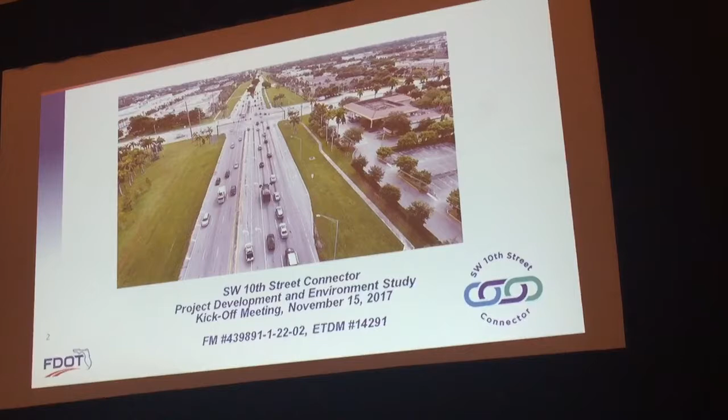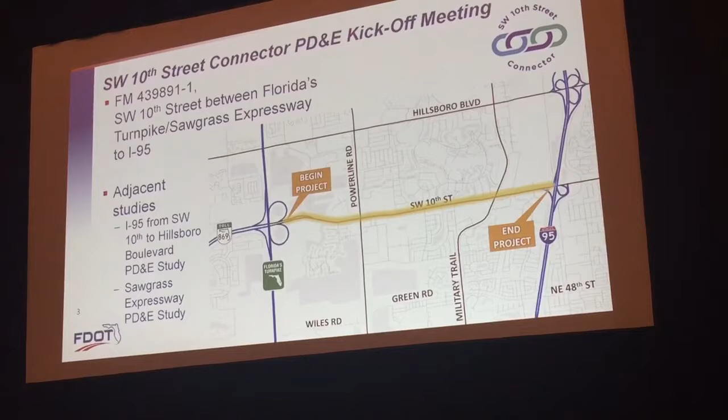Welcome to the kickoff meeting for the Southwest 10th Street Connector Project Development and Environment, or PD&E Study. This project is being conducted by the Florida Department of Transportation under Financial Management Number 439891-1-22-02. Tonight we will discuss the Southwest 10th Street Connector PD&E study from the Turnpike Sawgrass Expressway to I-95. While the adjacent I-95 and Sawgrass Expressway projects are being evaluated as separate studies, all three will be presented as one regional project encompassing the entire Southwest 10th Street corridor with connections to the Turnpike and I-95.

Representatives from these adjacent projects are here tonight to answer any questions you may have relating to those specific studies. This presentation will briefly review the Southwest 10th Street project history, the Metropolitan Planning Organization, or MPO, consensus study, activities that have occurred since the MPO consensus study, and describe the PD&E process and what will be evaluated as we proceed with the Southwest 10th Street Connector PD&E study.

Regional transportation planners recognized the need for improved transportation facilities in northern Broward County in the 1970s. In the early 1990s, FDOT completed a PD&E study to connect the Sawgrass to I-95 along Southwest 10th Street. The project was not advanced, however, mainly due to community concerns. In 2008, the Southwest 10th Street corridor underwent another feasibility study, but the project had little political or community support, and once again it was not prioritized.

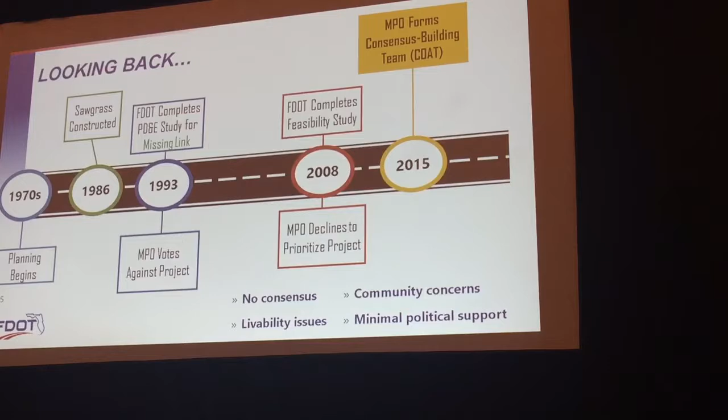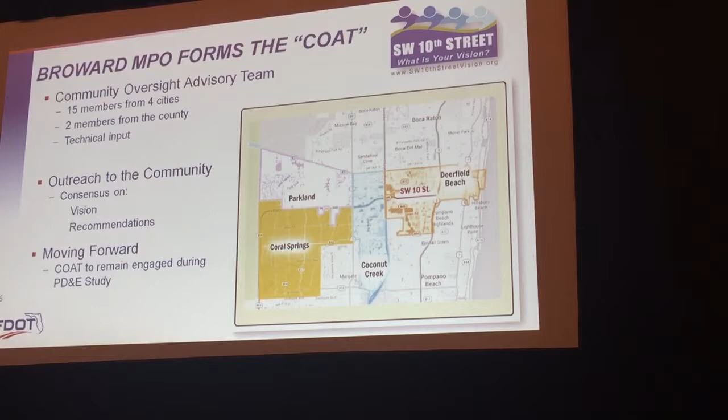Meanwhile, the traffic, safety, and operational issues along Southwest 10th Street continued to worsen. Realizing that some type of improvement was needed, the Broward MPO formed a consensus building team in 2015. This consensus building team was named the Community Oversight Advisory Team, or COAT, which consisted of 15 members from the cities of Deerfield Beach, Coconut Creek, Coral Springs, and Parkland. The team also received technical input from various county and FDOT representatives.

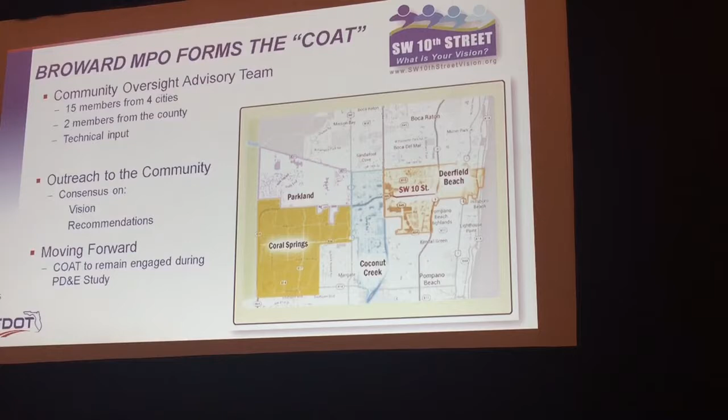The COAT's purpose was to formulate a vision for the Southwest 10th Street corridor that was acceptable to the community. The COAT also compiled a list of 18 recommendations to be examined in the PD&E study. In order to continue the collaborative efforts, the FDOT has requested that the COAT members remain engaged during the PD&E study.

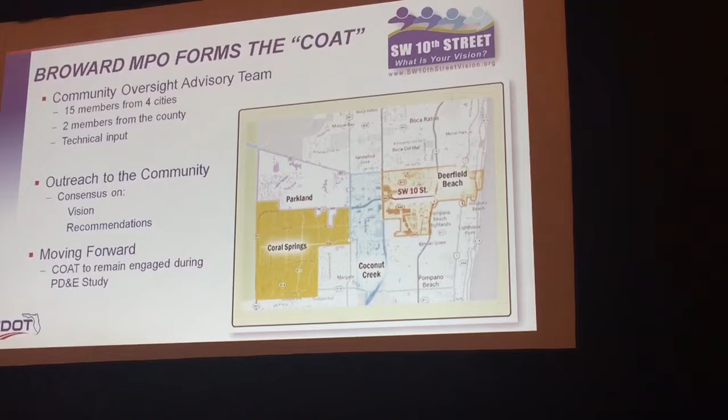The COAT's recommendations were formalized in a report and presented to the Broward MPO in 2016. Recommendations such as safety, improved operations, and environmental considerations have already been incorporated into the project's purpose and need statement, and all recommendations will be fully evaluated with the study. You will see gold key icons throughout this presentation. The gold key symbol represents COAT recommendations to be evaluated during this study.

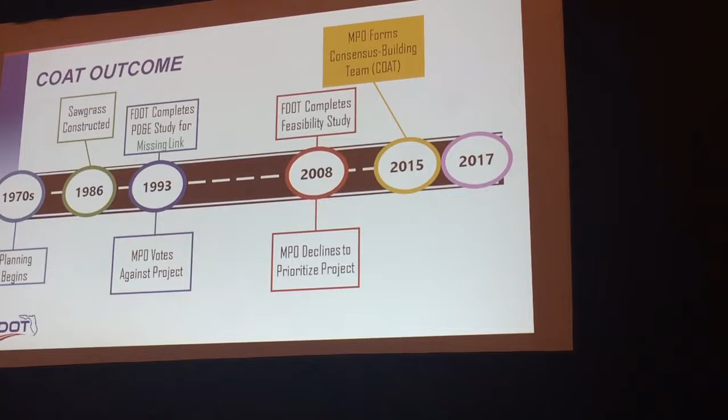Based on the COAT's efforts, the MPO recently decided to prioritize the project, and the FDOT planned and funded the new PD&E studies for the interchanges and the Southwest 10th Street connector. Prior to beginning the PD&E study and to get a head start on the project, the FDOT completed a lot of upfront work such as field surveys, traffic data collection, and traffic forecasting. This pre-work is the starting point for the PD&E team. Today's meeting is the first public meeting for the Southwest 10th Street Connector PD&E study, which is now underway.

The overall transportation project development process is shown here. We're in the PD&E step shown in a lighter blue color. In the PD&E step, engineering design alternatives will be developed that consider the COAT's recommendations. Public outreach and agency coordination will take place along with evaluations of environmental and community impacts. At the end of the PD&E process, the FDOT will recommend a preferred alternative.

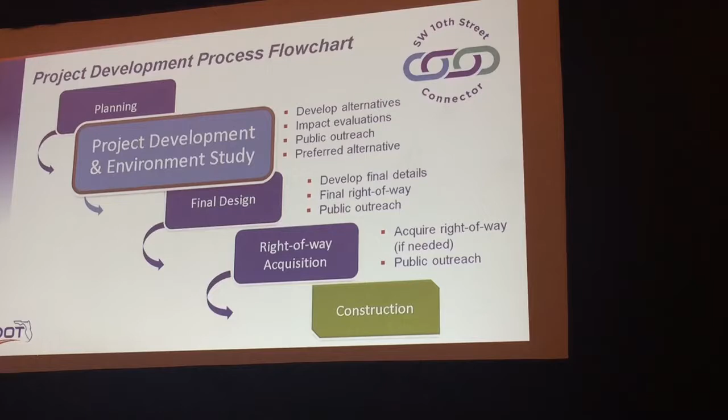A project development and environment study is the step after a planning study, but before a project enters into the design phase. A PD&E study must follow National Environmental Policy Act, or NEPA, requirements. During the PD&E study, all social, environmental, and engineering analyses are performed and documented regarding the proposed transportation improvement. These analyses will support decisions regarding basic design concepts and identify a preferred alternative.

Since a PD&E study is not a final design project, some elements are developed to a conceptual level of detail and must be further coordinated later in the design process. Public outreach is a very important component of the PD&E study and also supports the project recommendations.

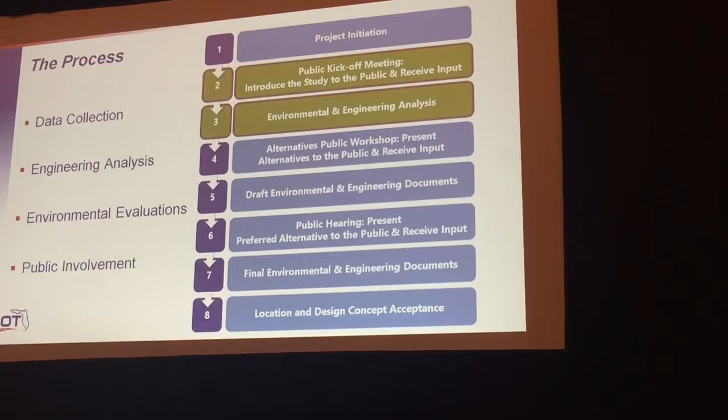The PD&E process is further broken down in this graphic. We're currently at steps 2 and 3, conducting the kickoff meeting and performing the engineering and environmental analyses. During the engineering analyses, alternatives are developed to meet the needs of the project while incorporating the COAT's recommendations to the greatest extent possible. Potential impacts to the corridor's social, natural, and physical environments will be studied and documented.

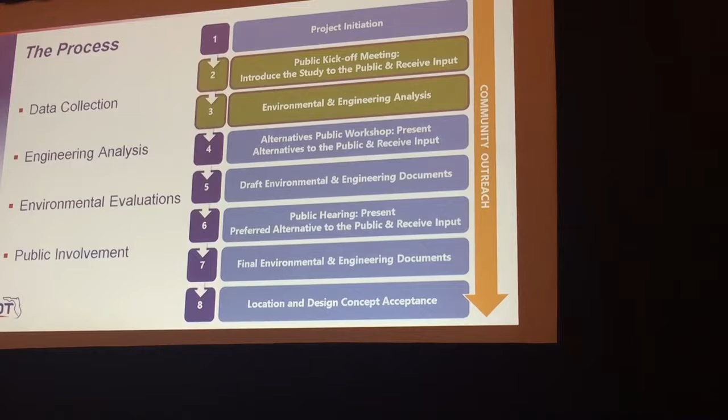A continuous community outreach process is integrated into every step of the project to ensure that corridor residents, businesses, the traveling public, and other interested parties have opportunities for participation and meaningful input throughout the PD&E study. There will be various opportunities for you to provide your feedback.

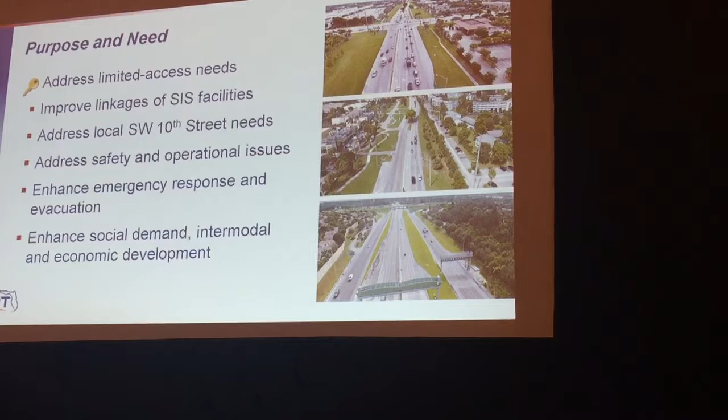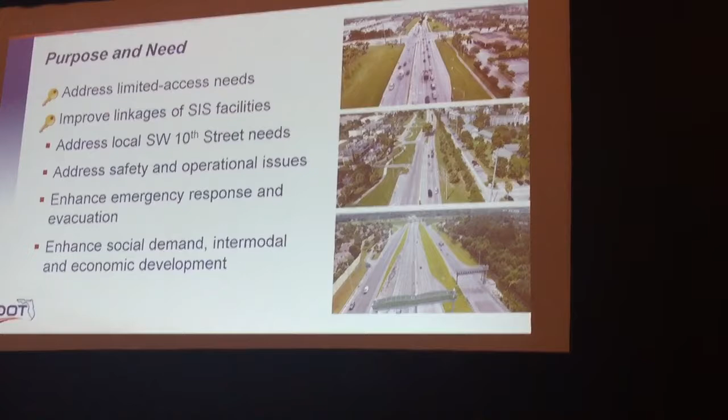Every PD&E project starts with a purpose and need statement. The purpose and need for this project is comprehensive and includes many of the COAT's key considerations. Providing a limited access or freeway-type connector facility along the corridor between the Sawgrass Expressway and I-95 will improve system linkages and connectivity between Strategic Intermodal System, or SIS, facilities. I-95, Florida's Turnpike, and Southwest 10th Street are all SIS facilities. SIS facilities are those that are critical to statewide mobility and economic development.

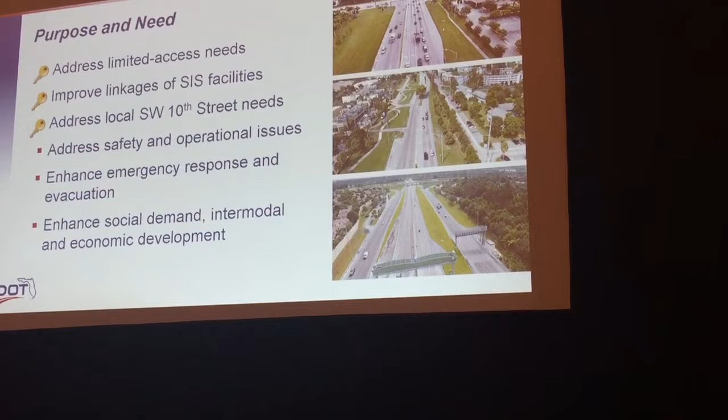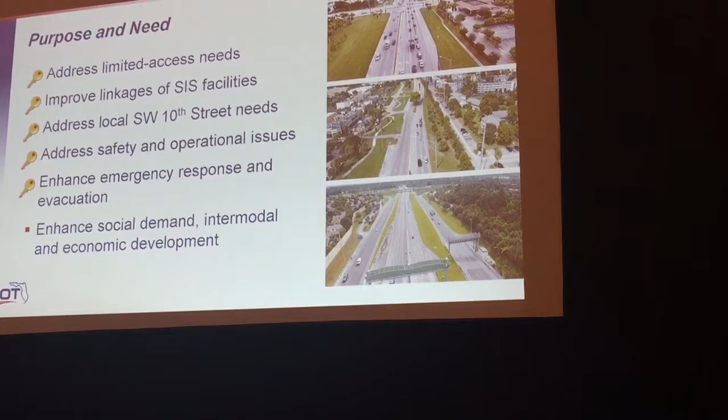Local transportation needs for Southwest 10th Street will be addressed, including the application of complete streets concepts and pedestrian and bicycle facilities. Safety and operational issues will be addressed along the corridor that will enhance emergency response and evacuation times. I-95, Southwest 10th Street, and Florida's Turnpike are all designated evacuation routes. This project will also enhance social demand, intermodal relationships, and economic development for the area.

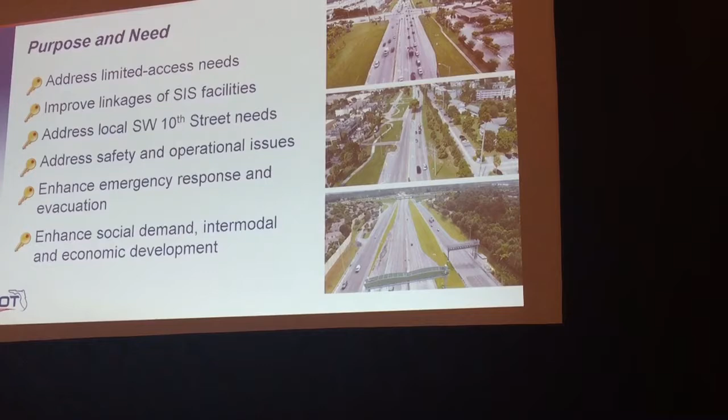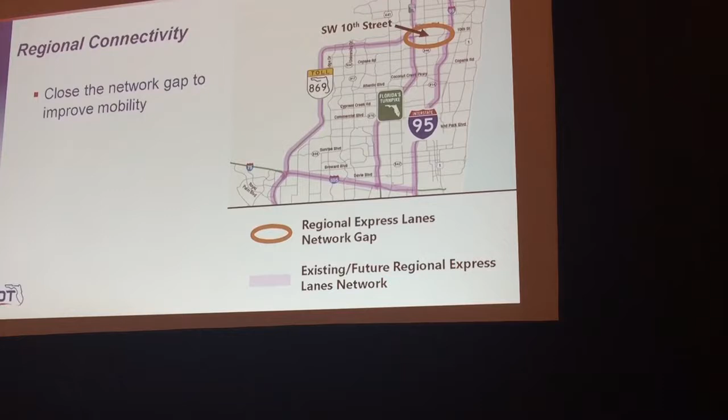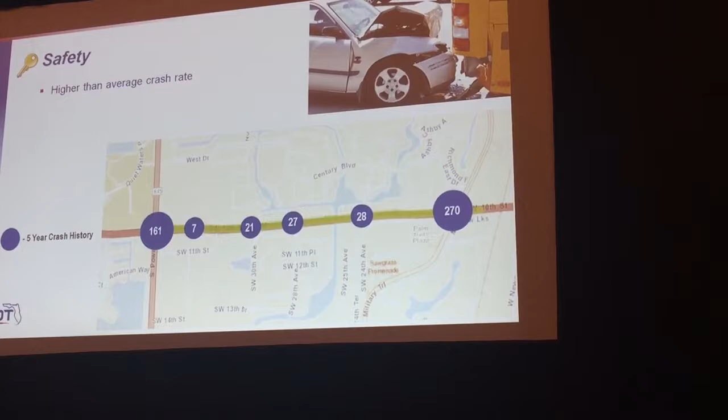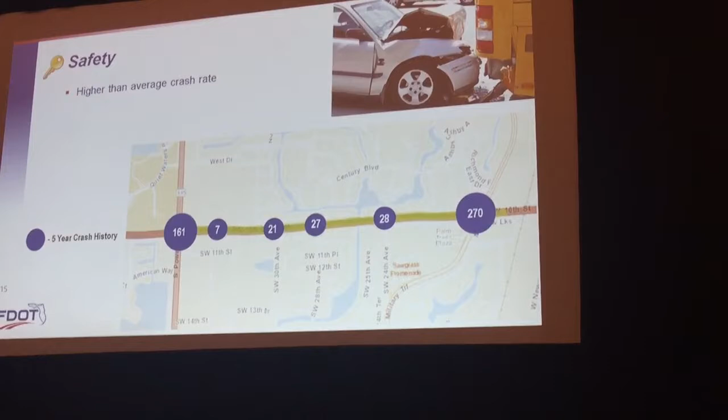The crash rate along the Southwest 10th Street corridor is higher than the state average. On average, there are 103 crashes with 105 injuries yearly. These crashes represent an economic loss of approximately $15 million per year. Three intersections—Powerline Road, Southwest 24th Avenue, and Military Trail—are on the state's high crash location list.

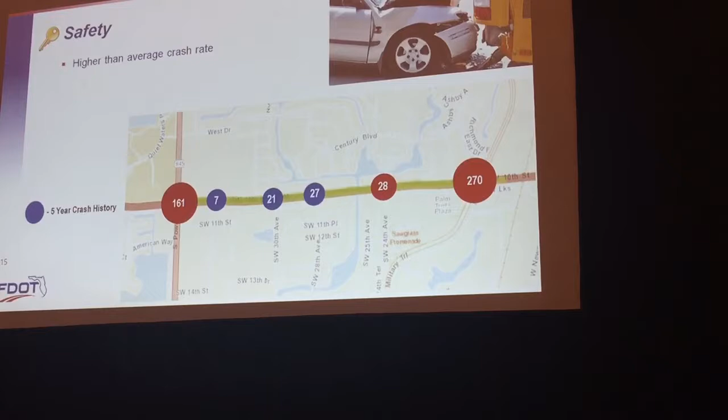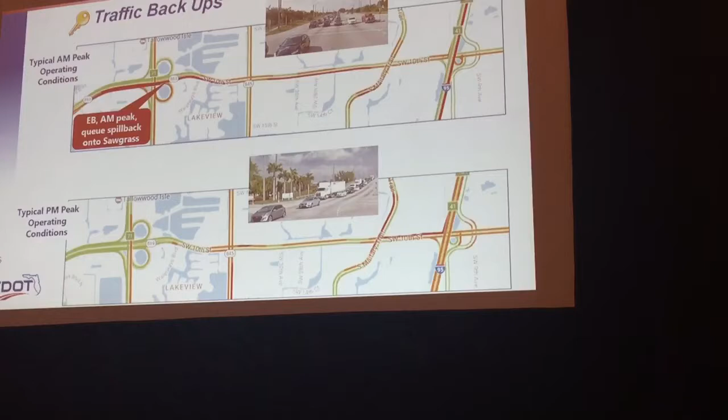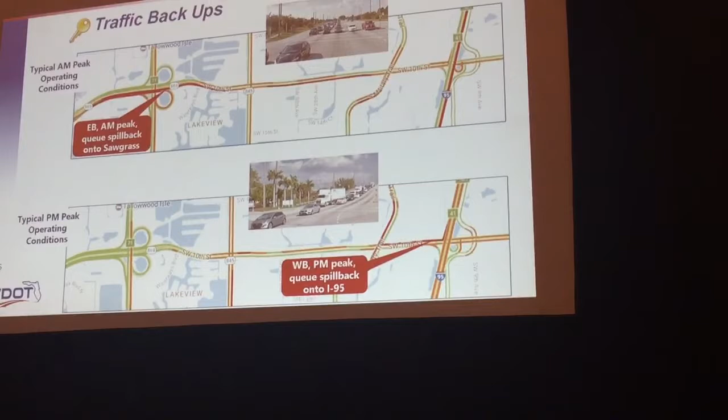Operational issues must also be addressed with any proposed improvement. Current traffic patterns indicate heavy eastbound traffic in the morning that backs up onto the Sawgrass Expressway. In the evening, westbound vehicles spill back onto I-95. Current level of service, or LOS, is measured from A to F, with A being the best or most efficient traffic flow, and F representing the worst traffic flow in congested conditions. The Southwest 10th Street corridor overall operates at an LOS of F.

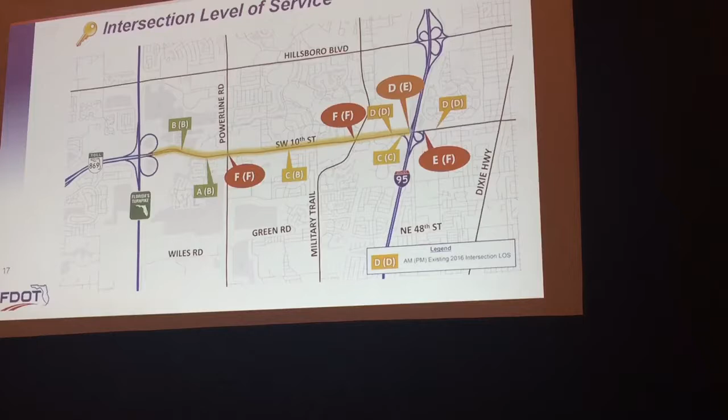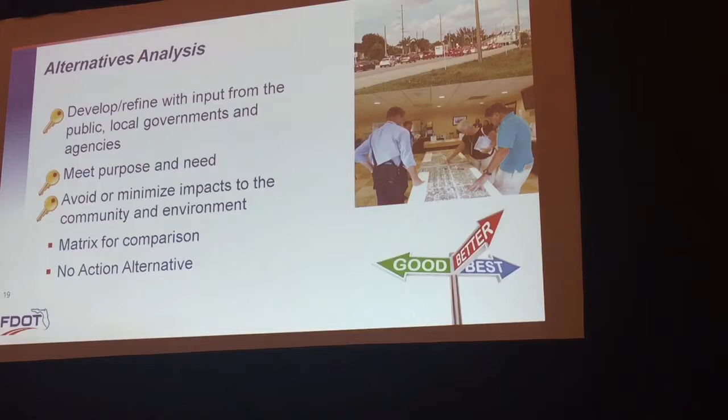The evaluation matrix uses common criteria such as community and environmental impacts, traffic operations, lifespan, and others to determine which alternative has the least impacts overall while providing the most long-term benefits for the communities. As part of any PD&E study, a no-action alternative will be evaluated and included in the matrix.

The team will evaluate two facilities within the Southwest 10th Street corridor. One will be an express lane facility to provide a connection between the Turnpike, Sawgrass Expressway, and I-95. Concepts will be evaluated with different entrance and exit ramp locations between Powerline Road and Military Trail for access to and from the express lanes and local Southwest 10th Street.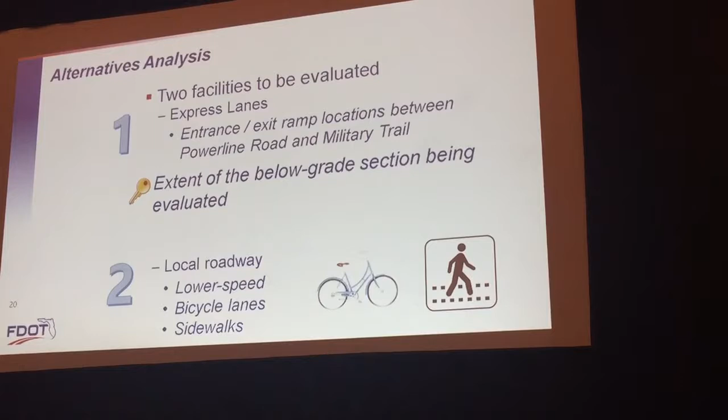The extent of the below-grade section is being evaluated for the express lane facility and will continue to be developed as the study progresses. The other facility will be a local, lower-speed roadway to serve businesses and communities within the corridor. Bicycle lanes, sidewalks, and other community elements will be evaluated.

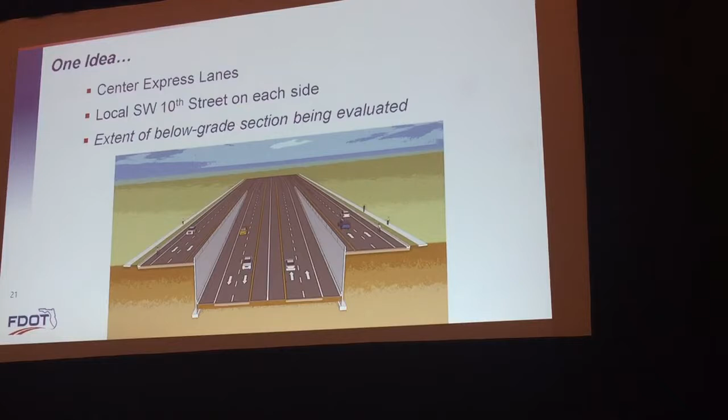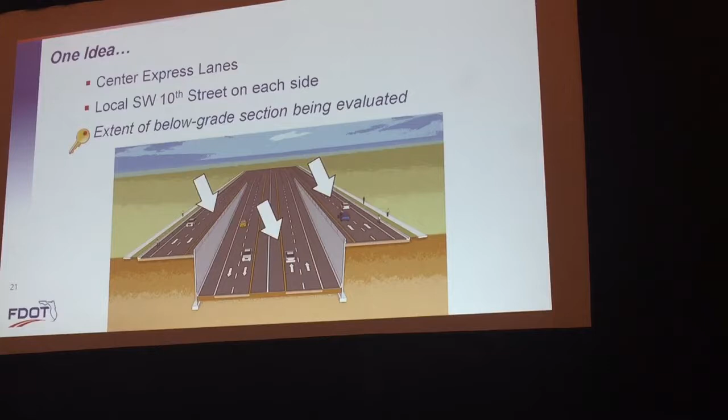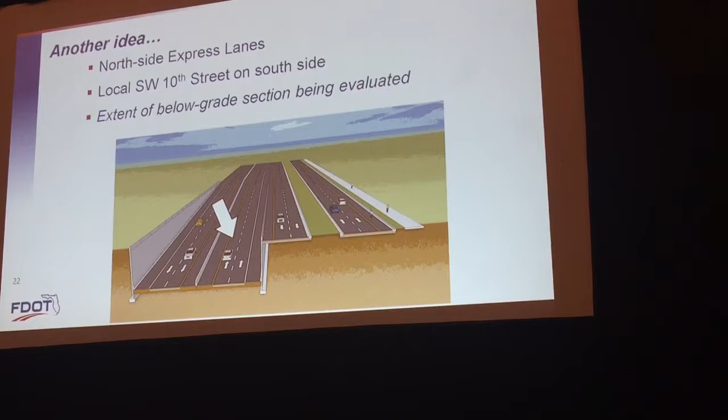Another concept under development is a northern express lane alignment. This concept locates the local Southwest 10th Street facility on the south side of the express lanes. This alternative is also being evaluated with a below-grade section.

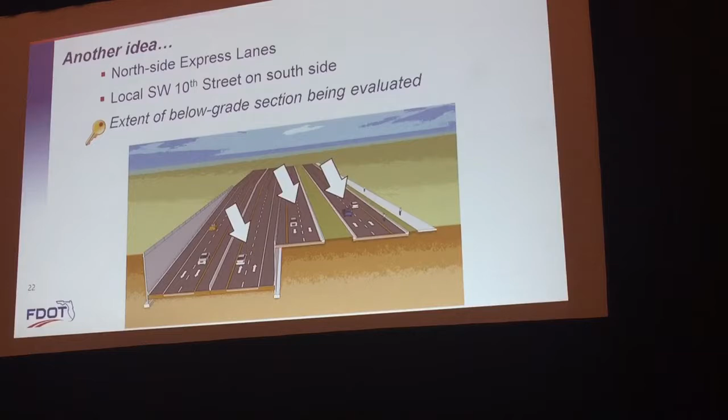Each build alternative will be evaluated as it relates to the natural, physical, cultural, and social environments, with the goal being to avoid or minimize impacts to these resources. Results of the analyses will be documented and reports prepared and available at a later date. Multimodal accommodations such as park and ride lots and transit will be taken into consideration during this study.

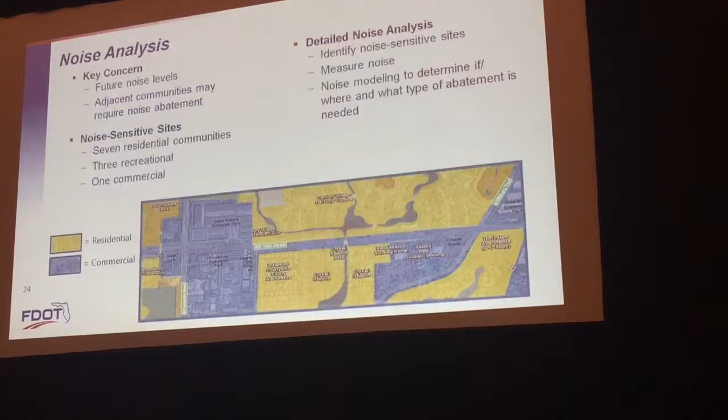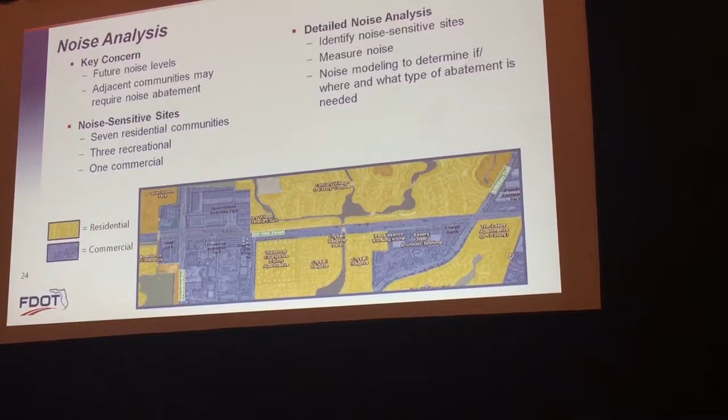Noise is a key concern for the communities surrounding the corridor, and a robust noise analysis is being performed. There are 7 residential communities, 3 recreational sites, and 1 commercial site that are noise-sensitive areas. Noise levels will be measured at various locations along the corridor and an analysis performed for each of the concepts.

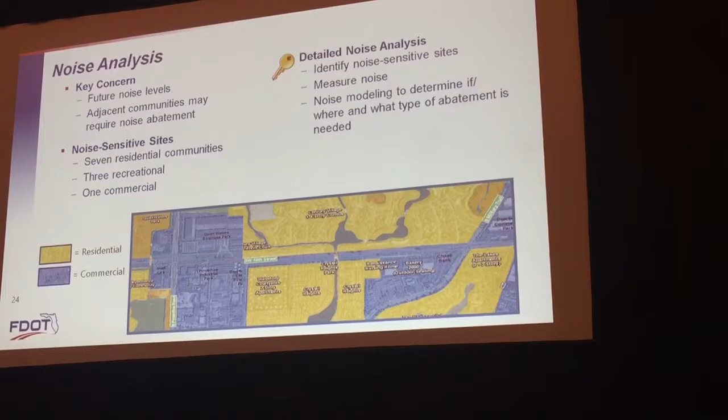Each alternative will be evaluated to determine if, where, and what type of noise barrier would be the most appropriate for the impacted areas. Noise walls, if required, will be closely coordinated with affected stakeholders.

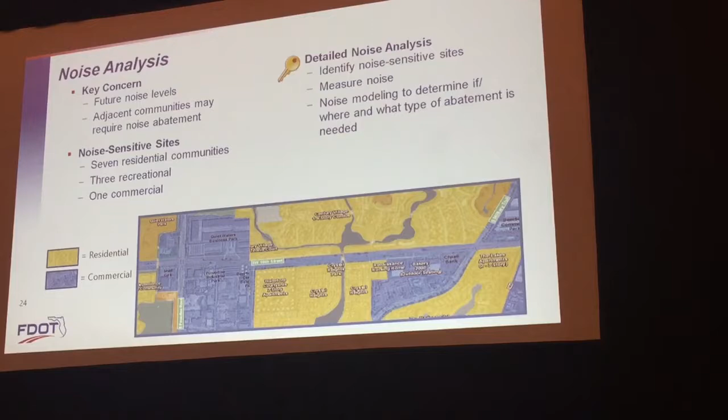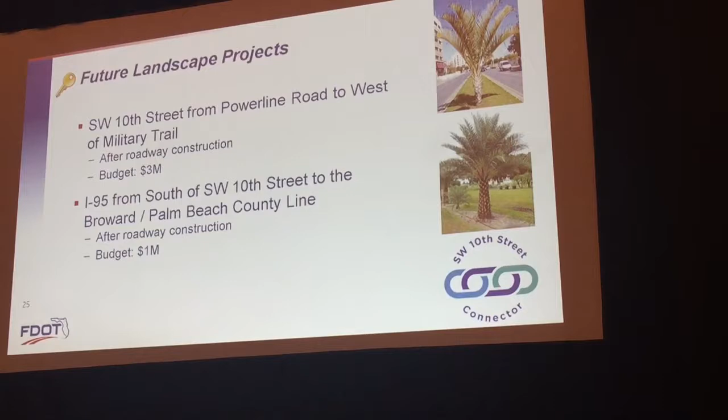The FDOT has already planned and funded two future landscape projects with ample budgets to address aesthetic elements along the corridor for installation immediately after construction of the roadway improvements. As the PD&E alternatives are developed, landscape design concepts will be developed and coordinated.

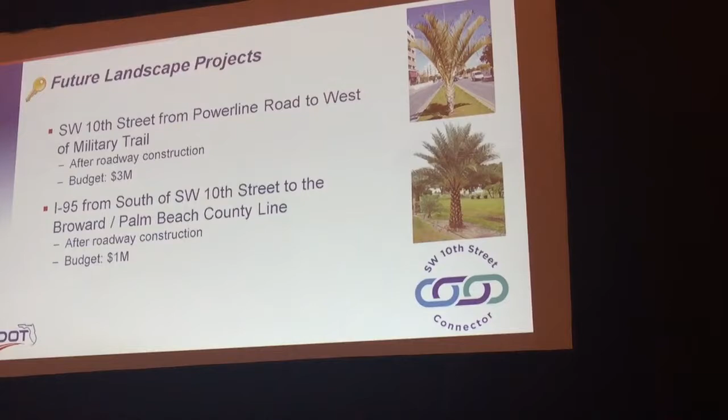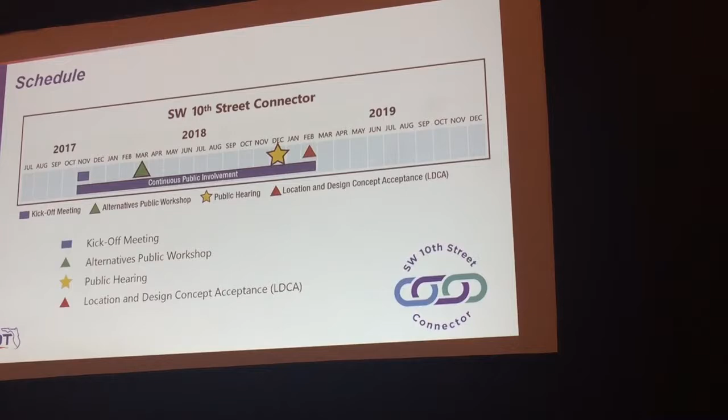Each of these meetings represents additional opportunities for you to offer feedback. Location and Design Concept Acceptance, or LDCA, signifies the end of the PD&E phase and is scheduled for early 2019. Continuous public involvement is included in the PD&E process.

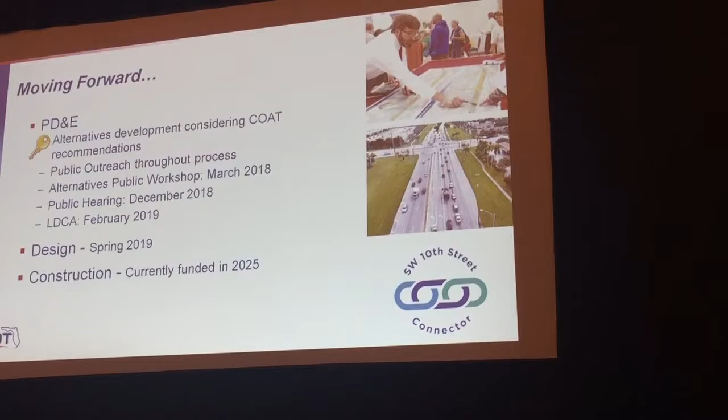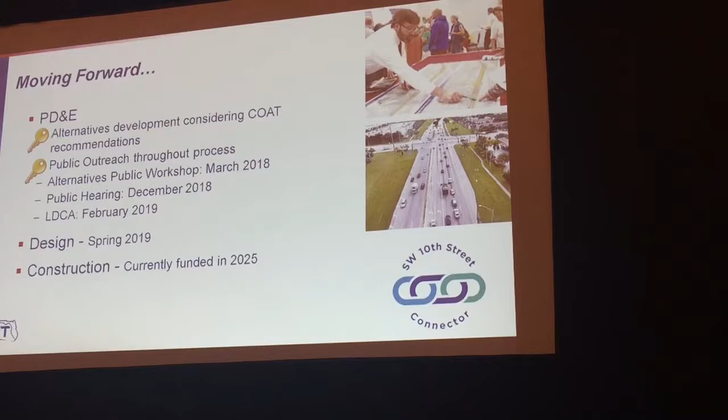As we move forward, alternatives will continue to be developed and refined, and environmental evaluations will be conducted. Public outreach will be continuous throughout the study, and interested groups are encouraged to contact the project team, who will be available for group meetings. The team looks forward to meaningful stakeholder engagement during the PD&E process and welcomes all input.

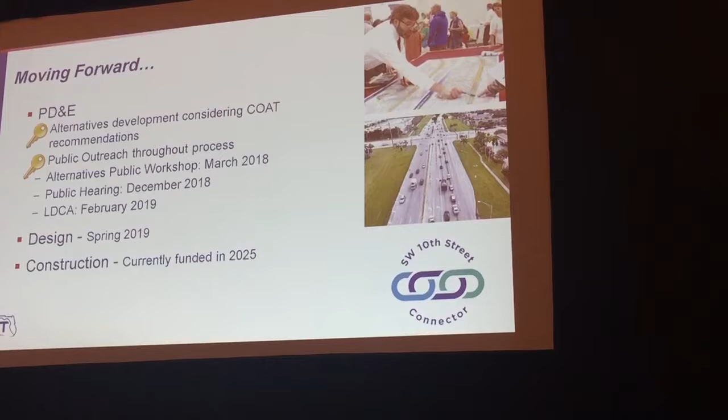The Alternatives Public Workshop represents an additional opportunity for you to provide your input and feedback to the team on the engineering concepts being developed. The public hearing is another meeting where you can provide your comments.

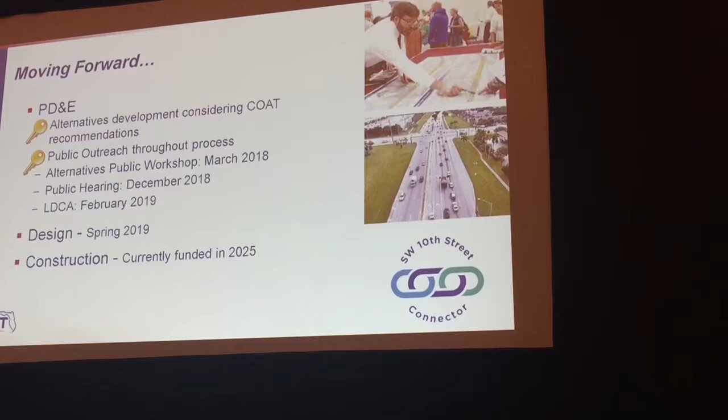This project is currently scheduled to begin the final design phase in the spring of 2019. Currently, construction funding is in 2025, but FDOT is working hard to advance funding to get this important connector constructed in order to complete the regional roadway network.